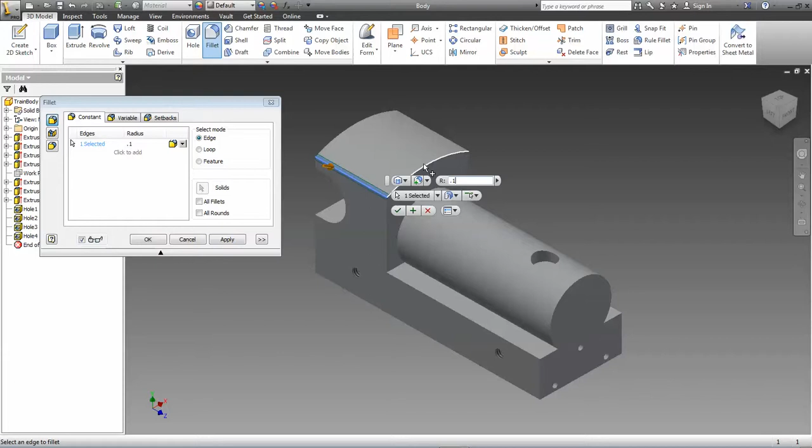But since all of the fillets or the rounds are the same, you can do this in one feature. So I don't want to see in the browser when I examine your train body like 8,000 fillet features. I should just see one. Okay, and I'm not sure why this dialog box is collapsed like that, but now all you have to do is just select all of the edges. See? And there's a bunch of them. There's like 30 of them. See this little tiny one here? Don't forget that one. There's that one, that one, that one.

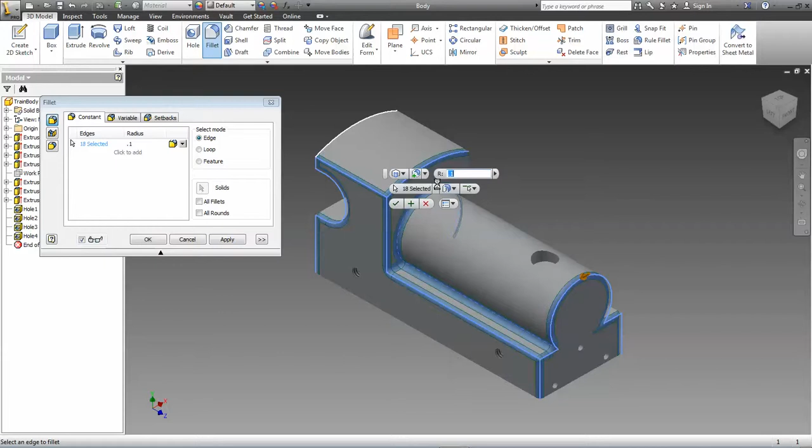There's a whole bunch. So I'm going to try and remember them all, and again, don't do the bottom edge, okay, because we're going to have wheels down there and you're going to have the cowcatcher, and it just works best if you don't do that bottom edge. And remember, don't do the hole edges either, because those are going to be flush with whatever we're putting in the hole, right? So let's see, that side looks good. Now we got to get this side. There, don't forget in here. We've got this edge there, that edge, that one, under here, that one.

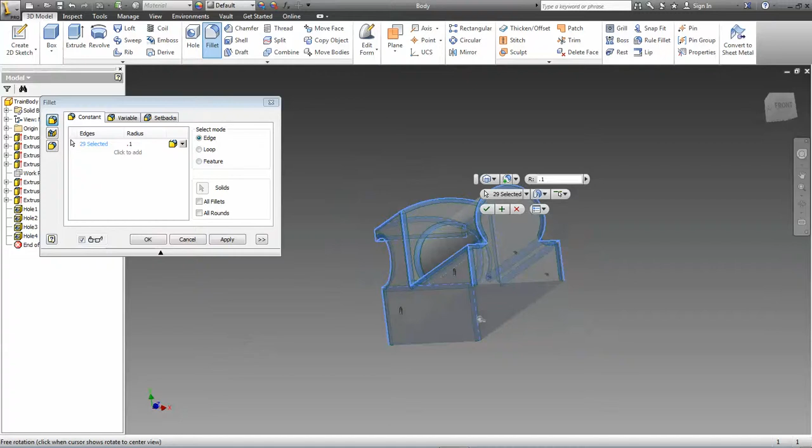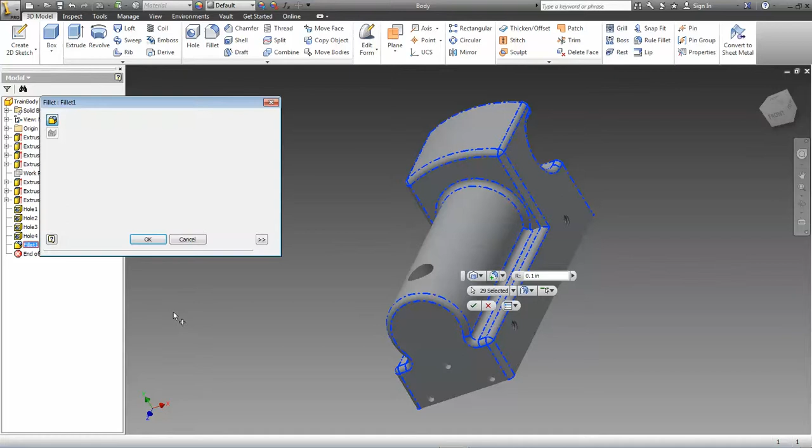Now what are we up to? 29? That may be it. I can't remember. There's like 29 or 30. You can always go back and add them if you miss one. It looks like I got them all. It's real easy to miss one of the little tiny ones though, sometimes, like these little ones up here. Looks like I got them all though for now. So I'll just say okay. And if I find one that I missed, like sometimes people miss this one in here, all you have to do is go back, double click, and add an edge just by clicking on it.

Okay. So there's our complete modeled train body. The only thing we have to do is, if you check the material for this part, I believe it says ABS plastic, and we might want to give it a color, right? Sometimes it's nice to have a colored part, but let's see, up here in this drop-down menu, that's actually the color. Over here in this drop-down menu, here's the material. You'll scroll down and you should see it's up at the top, yeah, ABS plastic,

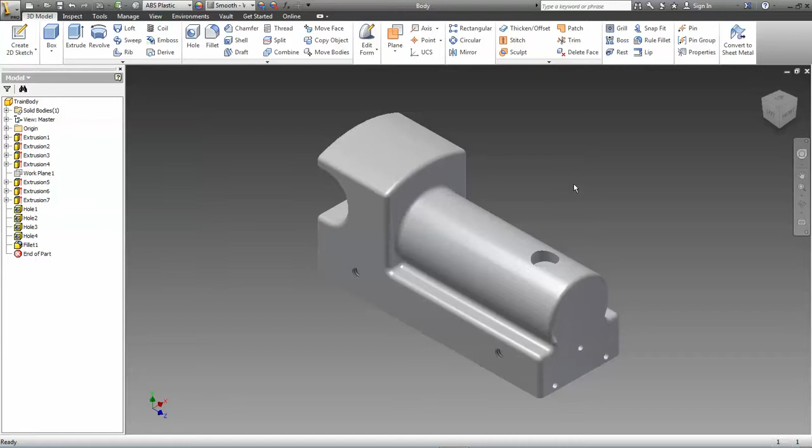and it changes color slightly. We could always colorize it, but you guys are going to modify things according to your train's theme. But having the material set up will allow us to do all kinds of other analysis and check the mass properties, density, weight, volume, and all that kind of stuff. So there you have it. There's your completed train body.